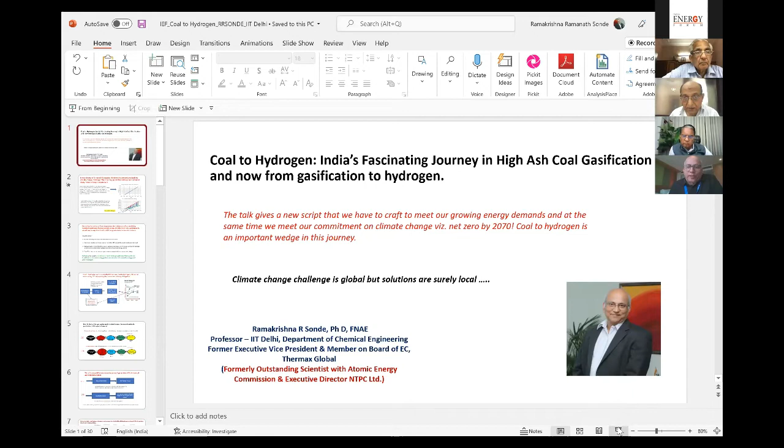All the distinguished speakers before me have really set the stage, which I think makes my delivery of speech very, very easy, because all the points that I wanted to make in my beginning have been made by everybody from Mr. Bambani to Shahi Saab to Gautam Saab and of course the Secretary, Ministry of Coal. So elegantly they have made it. So it makes my task easy.

But still, I will do a broad brush on this hydrogen. I will not get into too much detail. Maybe my subsequent speakers, both Dr. Chauhan and Mr. Samir, will get into the details about the flow sheeting and everything about hydrogen. But I'll remain on a broad brush about India's fascinating journey and why it is now imperative, I'm underlining that word imperative, to actually now look at this coal hydrogen.

And I just want to remind such an august audience, when we say coal generating hydrogen, it is not the hydrogen within the coal matrix, but it's actually splitting water. So it's actually coal and water giving rise to hydrogen and carbon monoxide.

So hydrogen comes like a water electrolysis. It comes from a thermolysis process. So I just thought, let me make it very clear that the hydrogen coming from coal is water hydrogen. Maybe only about 8 to 9% of the hydrogen will be from the coal gasification, but the rest of it, because you're taking it to a temperature of 950 degrees centigrade under catalytic conditions, you are actually getting hydrogen from water.

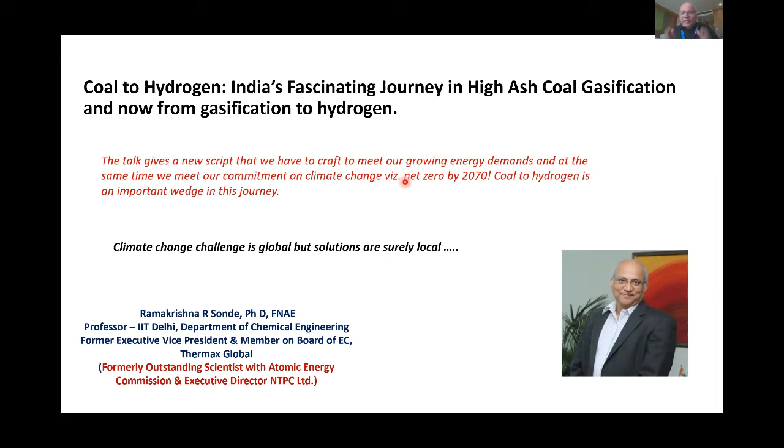So to that extent, this kind of debate about all the colors that we're giving it is a little bit, I think, as Dr. Jain said so eloquently, some Western concept that we are trying to brute force into our society, to a great disadvantage to all of us. So I think coal hydrogen becomes as green as anyone, and that's where I'm going to be making my presentation.

So like all of you said, I have done my own modeling of our energy scenario for the next 3 to 5 decades, meeting the target with the climate change challenge, and there's a big gap. Today, India is consuming about 7,000 terawatt hours of total energy, of course 1,400 terawatt hours of electrical energy. If you convert everything into terawatt hours, I don't want to get into kg of oil equivalent, but I thought terawatt hours would be a much better number, which Mr. Shahi will be able to relate to.

So if India is consuming 7,000 terawatt hours, my own analysis has shown that by 2050, India's energy requirement will be about 46,000 terawatt hours. There's a basis for this, and the basis is getting onto a per capita consumption, because India is still a work in progress. So we would need a lot of energy to reach that particular level.

And therefore, from a current 3% of the world energy requirement, India will consume about 10%, and that's equitable energy. Because of the 1.5 billion people, we will definitely require 10%, because by that time the population will be 9 billion people. So if there are 9 billion people and we'll be 1.5 billion, I think 10% of the energy consumption will be in India, and that will be about 46,000 terawatt hours. I've done my own analysis, and I'm ready for any debate on this.

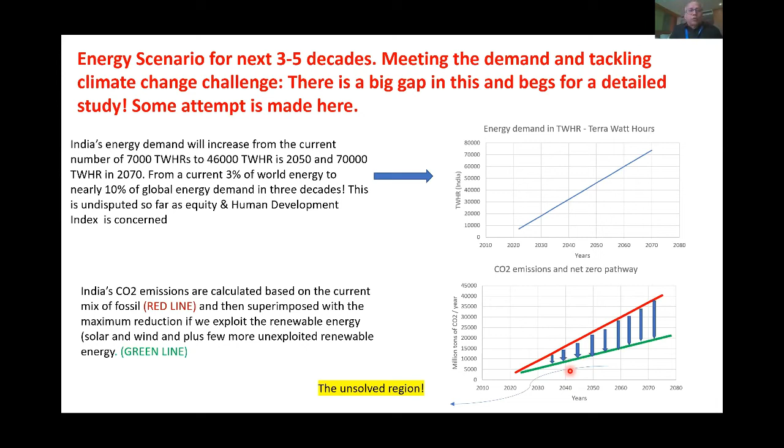So this reality strikes us from the previous plot, that even after considering maximum exploitation of the renewable energy for India, which is growing, we will need energy from fossil. Absolutely, I think this has been said. I'm just reiterating the points made by my august previous speakers. So energy independence is a vital doctrine of our country, and we all will have to do that.

We have seen what is happening today with Ukraine and Russia, and therefore it does not need a re-elaboration that we need to have energy independence. So in my opinion, what is it that we need to do? That's where I'm proposing to this audience five goals which are very, very critical. Number one, coal is our backbone, and we can last for 200 years.

At the accelerated energy, even if I take the business as usual case, with that 300 billion tons, 190 billion tons on the surface and another 200 and odd billion tons underground, it can meet the requirements. So that is one plus point. That's good news for us. Number two, coal has to reinvent itself in a new pathway, and that is the one I'm going to be bringing up. In fact, I just want to re-emphasize this point. Coal has to reinvent itself.

That whole thing about untouchability of coal because of the carbon dioxide will have to go. That means coal to gas, synthesis gas, and then do whatever you want to do, capture at the source itself. And I'll tell you the elegance of this kind of technology. Hydrogen becomes an abundant carbon-free energy carrier. So point number two is a very, very critical point. I'm converting it into a new gas, and CO2 capture at the coal gas conversion stage itself is a zero emission design. So you can always convert that and get into this.

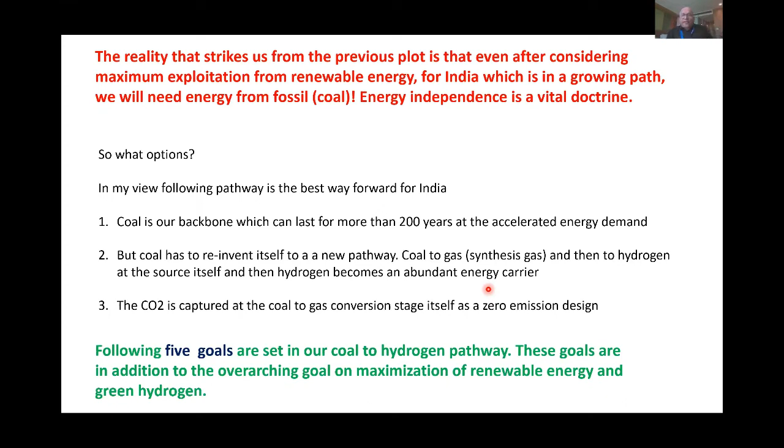I'm saying that India, with all that, will reach about 8,000 gigawatts of renewable energy, which with a capacity utilization factor of 18% will meet about 25% of our energy requirement by 2050, and then of course 2070 when we are talking about net zero. So we need to maximize that. Let me not go into what we have to do in terms of maximization. But if you agree to my argument that the balance has to come from coal, that's where I'm going to be talking.

So essentially what I'm saying is that India has to go into clean coal technology, gasification, hydrogen, and a whole lot of hydrogen-based technology. That's a very important point I'm making. Hydrogen is not to be used only in ammonia or refineries or petrochemicals. Hydrogen has to become a main energy carrier, which can generate very high energy at the demand side. That means coal to hydrogen, CTH versus CTE, abandoning the combustion pathway altogether is extremely important.

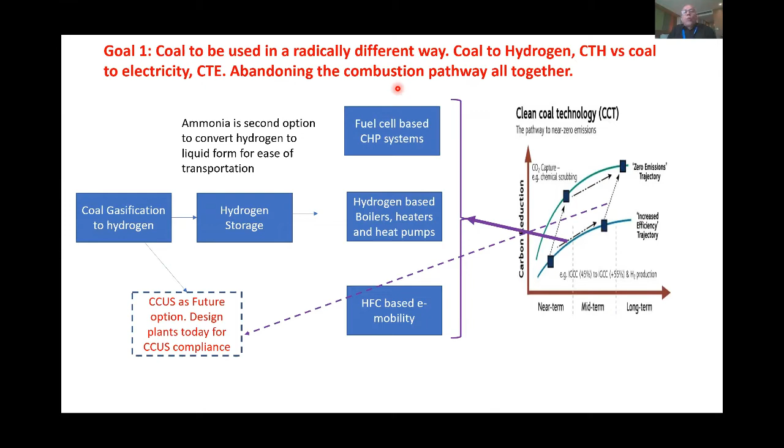So the first statement I'm making, the mindset change Shahi mentioned, is that we need coal, but coal, which was done 200 years back with a steam Rankine cycle, has to reinvent itself into coal to hydrogen. Why am I saying that? I'm saying that because look at this cycle.

This, I think, should be giving us why this particular thing. I've done this analysis, my dear friends. I can again put this in front of all of you. Coal to electricity: in the current way, when I put all this fuel extraction, combustion island, power island, transmission, T&D losses, distribution, from cradle to grave, the overall efficiency is just about 20%.

That means for every kilowatt hour that I'm receiving in my room here, 5 kilowatt hours have to be generated and 4 kilowatt hours of carbon dioxide is emitted. And that's true, this is the problem. In fact, we are blaming coal unnecessarily. Actually, we should not blame coal. It is the way that coal was utilized, because that was the cheapest way. The Industrial Revolution thought that that's the best way you can do it. The cost of coal was low, and therefore nobody bothered about efficiency.

And therefore, this particular thing became a global gold mark for converting energy from coal. And the new pathway, my dear friends, is this high efficiency pathway. I'm not bringing carbon in right now. This is my goal number one: if I'm able to convert this through gasification, the first reason is that water is split here. You get an efficiency of 95%. So there is no problem of the second law of thermodynamics, which comes in the previous cycle. Today, the gasification that I'm working on is giving us 95%. Actually, we can even recover that 5% and make it 99%.

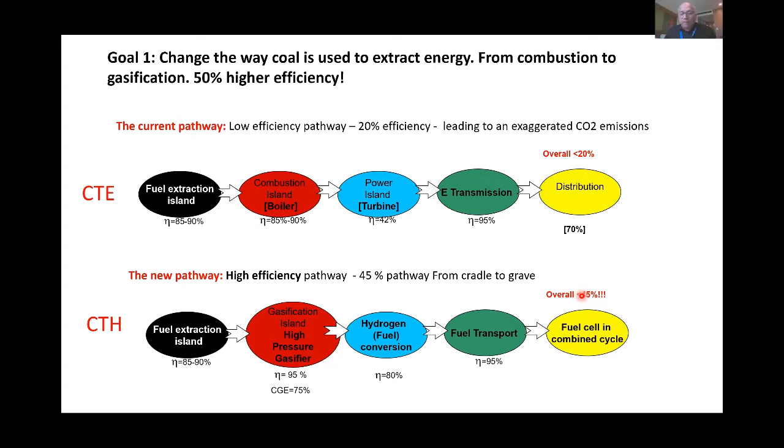And that is the main importance, what we should promote to the policymakers and every arm of society. If coal is reinventing itself, then it becomes a central energy focus for India. Now, my implicit point is that even if you don't capture carbon dioxide, we have to actually shave the overshoot rather than going for net zero right now. We'll reach there eventually by 2070, but right now, killing the overshoot of a 1.5 degrees centigrade rise, reducing carbon emissions while not compromising our energy consumption, is done by this particular process. And then the difference becomes even more when CCUS is bolted onto the basic plant.

So very clearly, a combustion-based process with carbon capture, and I was working on this when I was in NTPC, is actually a fool's paradise, or I don't want to use those extreme words, but it's not going to work out. It's not going to work because you have brought the carbon dioxide concentration to such a low level, and to capture it from there, the penalty that you pay on the electricity will be of the order of 35 to 40%, and that much investment is required. If FGD is going to cost so much, imagine what carbon dioxide capture will do.

Whereas if the coal is converted to hydrogen, it becomes very nice because by virtue of its pressure, by virtue of pre-combustion, your capture is already part of the gasification process, and those details will be indicated by my subsequent speakers. I'm tempted to give you the details, but there are important points that I'm giving here. One is hydrogen is from water. Number two is high efficiency in the entire kernel.

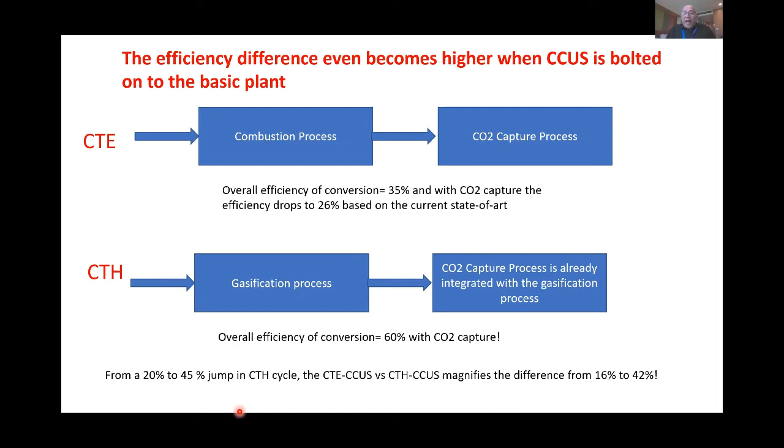And the third one is that carbon dioxide capture becomes easy, you can capture carbon dioxide like this because you've now got high pressure, your equipment is small, and the cost of the hydrogen is going to be much less. So 35% efficiency becomes 26%, and therefore it becomes very elegant. So please, I would consider that for India, coal to hydrogen, I'm making a little bold statement, is also green for India because it emits half the CO2 and capture is easy.

When I put capture, I compare apple to apple, a capture from a combustion to a capture from a coal gasification. First of all, hydrogen is able to deliver end use by various other mechanisms of much higher efficiency than the electricity. And second, I'm able to capture the carbon dioxide. Hence, the energy that is required for capturing carbon dioxide makes it that your carbon dioxide emission comes down dramatically by using hydrogen.

And you may still emit some part of it. I think we should give that allowance. When you see zero, it is not really zero. So CTH cannot be taken out of the discussion for hydrogen economy. Though we have been talking about all these things, I strongly feel with capture or without capture, hydrogen coming from coal, I hope I'm ready for a long discussion on this, but this is the basis for us to understand.

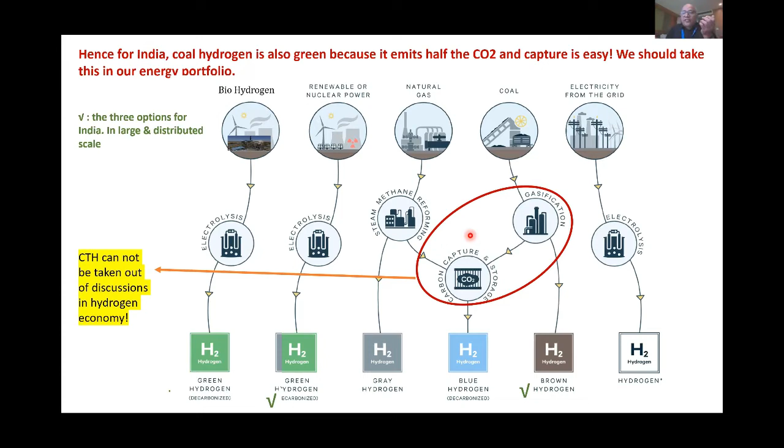And as Dr. Jain so eloquently mentioned, we will be able to deliver at 150 rupees a kilo. Again, I've done that detailed analysis. If you get the coal at about 1.8 rupees, as Dr. Jain said that you can get it at 0.8 rupees a kilo, I think we can get it under 100 rupees. And that's the beauty, if you get a 95% efficiency in your gasifier. So I'm making all these statements saying that, of course, this is 150 rupees.

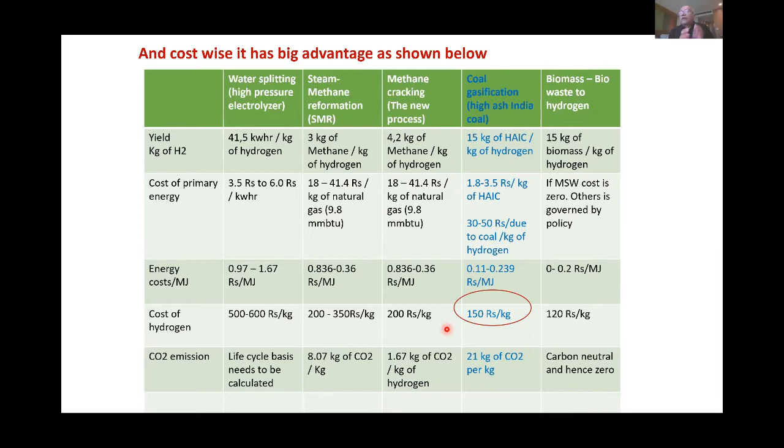If I bolt on the carbon capture, that is where this cost may become about 240 to 250 rupees, but they are far, far cheaper than what you get from your electrolysis, with those huge challenges of anion exchange membranes and various things. So if you put every factor, I'm feeling that coal reinventing itself in the form of hydrogen becomes here.

But important thing, as was also very well mentioned by Dr. Jain, Secretary, hydrogen can be made from coal today, it's a low-hanging fruit, it can be done today. But do we have an infrastructure built for hydrogen? So the focus should be not simply production: hydrogen as a carrier, hydrogen as a thermal energy supply for industrial users. When Mr. Shahi invited me to talk about fuel cells, I said that a fuel cell is a beautiful tool compared to a battery, sorry for this repetition.

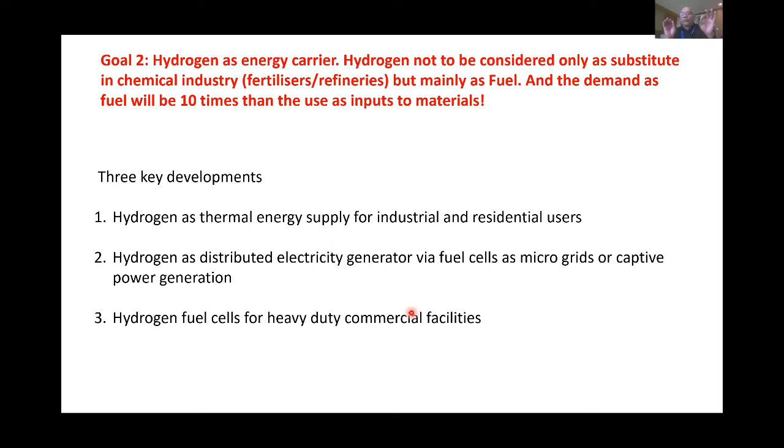Hydrogen as a distributed microgrid energy generator or hydrogen in fuel cells for heavy-duty commercial facilities will be just music for this country if you are able to get abundant quantities of hydrogen coming from coal at such a low cost at the mine mouth, and then convert that into whatever you want. You can take it as pure hydrogen, or into ammonia, or methanol or ethanol. So goal one is production. Goal two is hydrogen as an energy carrier. I'm sharing my presentation.

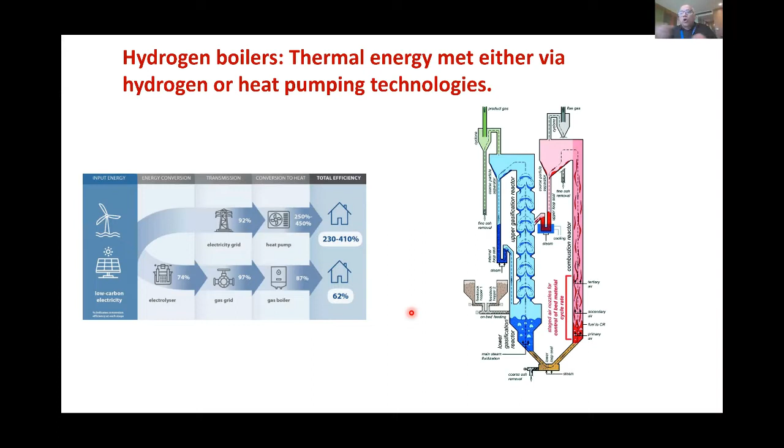Today, a hydrogen boiler gives an efficiency of 106%. Don't laugh, what is this fellow talking about, efficiency more than 100%? Yes, 106% on an LHV basis, because there is no acid dew point. Your waste can be as low as 60 degrees centigrade. Therefore, compared to a coal boiler, which can give about 88%, you can get 106% from a hydrogen-based boiler, with no NOx, no SOx, no particulate matter, nothing.

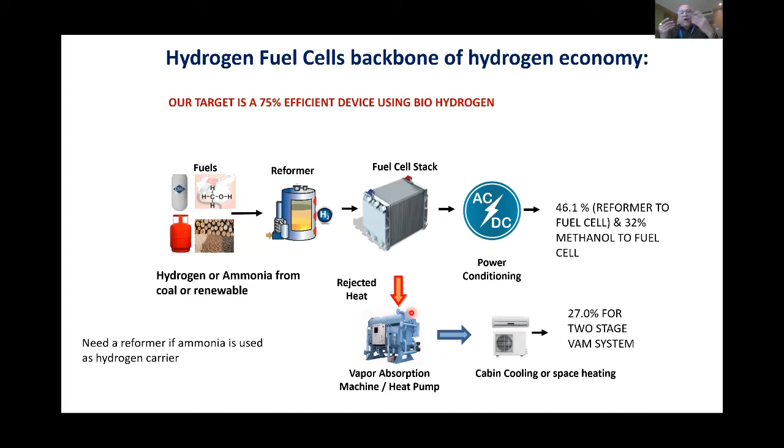And then hydrogen in fuel cells. I think we had one session on fuel cells; you can get 75% today with combined heating and power, because the fuel cell itself generates at 57%. They are far above ultra supercritical, which are languishing around 40%. This will take you to 60% like a combined cycle at a small kilowatt scale, using the waste heat. And vehicle-wise, absolutely fuel cell vehicles. I don't think there is any competition to a fuel cell based vehicle for India.

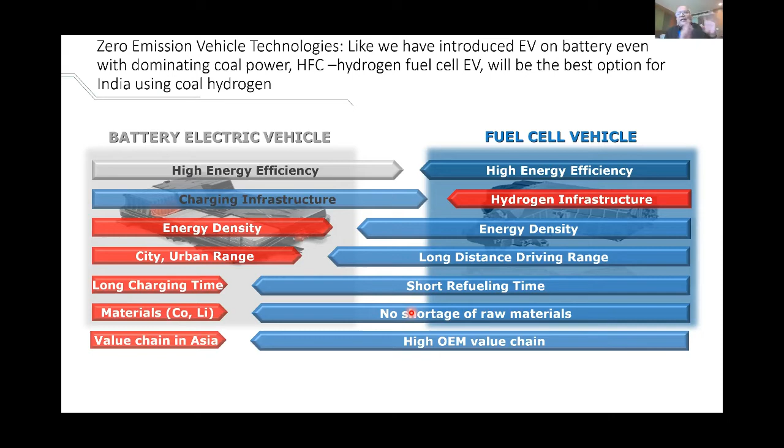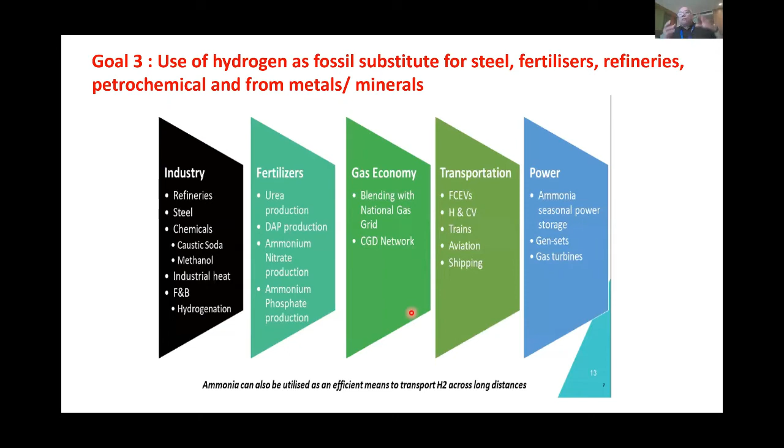When you're talking about the trailers and trucks and buses, intercity, where you can't be expecting to be pulling power from the wires and charging and all that. Yes, in a city it's okay, but not in this. So these things are important. Goal 3 is, of course, we can use hydrogen outside this energy also as a substitute in steel, fertilizer, refineries, as we have discussed. So this is the next one.

The fourth goal, an important thing, as I said, is pre-combustion carbon dioxide capture, which, as I said, we can capture in a snap of the fingers. That's the power of this hydrogen generation and capturing it. I have done a lot of work, but I'm not going to get into the details of what is the energy penalty for coal to hydrogen to capture carbon dioxide. As you can see it here itself.

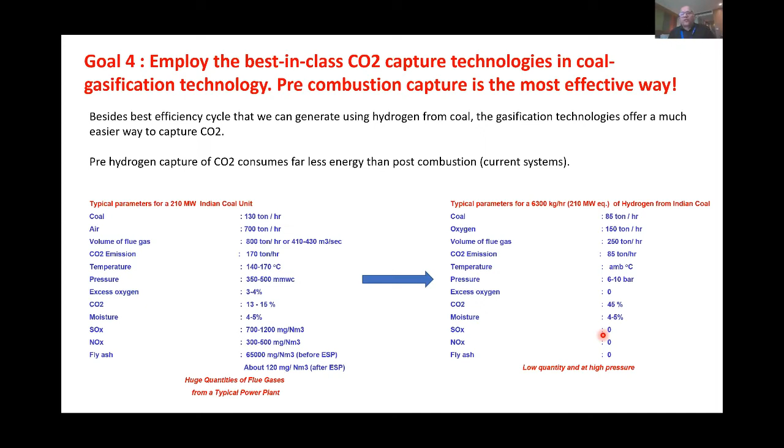We can design carbon capture ready hydrogen plants, and then bolt this on, which would make it very easy to integrate. Today, to integrate carbon capture in a thermal power plant or a blast furnace or a cement plant is, I mean, we are doing it, but it will not work out. So this is what I'm talking about.

And the last goal, my dear audience, is the CO2 conversion sequestration pathway. As Shahi Sahab so well mentioned, sequester biologically, sequester in CBM. I think we should do that. If the US is able to do it with enhanced oil recovery and all that, why not we use this? If you put your CTH plants, coal to hydrogen plants, near the mine mouth and sequester it, you don't even convert it into any chemicals. You do it, but the problem is so big.

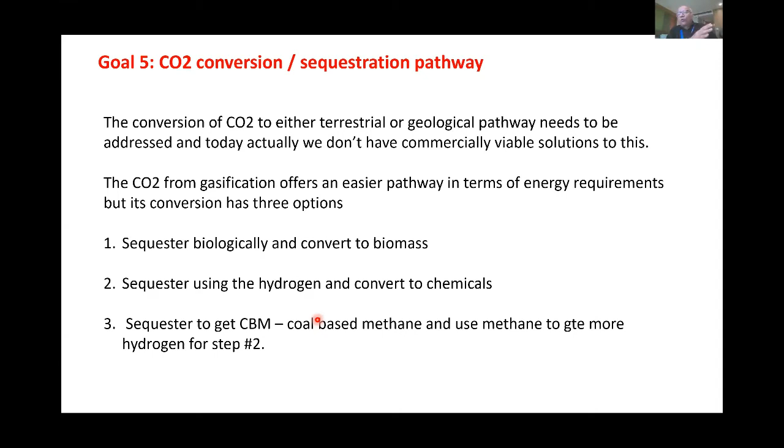We have 3,500 million tons of carbon dioxide, and conversion sequestration is the best pathway if we are able to put it in place. Of course, a huge amount of science is to be done. What happens to the seismic problems? What happens to the cap rock? And what happens to the mineralization? So there are a lot of things I don't want to go into, but I'm fully available for any questions on how we do this.

There are financial aspects, but I'll not get into the details of finance, because bringing finance into carbon conversion is a little, may I use this word, perverse? Because carbon dioxide has benefited this entire world to reach this level, and today you cannot again valorize it or convert it to anything. You need to have taxation. Developed countries should now pay more carbon tax. Unfortunately, this did not find its mention in Glasgow.

India and developing countries, where our energy has not plateaued, need to get, maybe I would say, $180 a ton of carbon dioxide. And the poorer nations should actually be getting more. So there'll be graded carbon taxation. Only then can you make carbon dioxide capture easy. The question is hinging on the capability for coal gasification, because gasification becomes an important part, gas cleanup becomes an important part, and that I would leave to the subsequent speakers.

But I would like to say, compared to all the imported technologies, the entrained bed, or even the fixed bed or moving bed coming from Lurgi, for India's high-ash coal, I think there is no further debate required, and I'm willing for a debate. Fluid bed gasification becomes the best one. Fluid bed is a broader definition for India's high-ash coal gasification. Fast fluid bed becomes a very important thing, and that is where we have developed this technology. I will not go into the development.

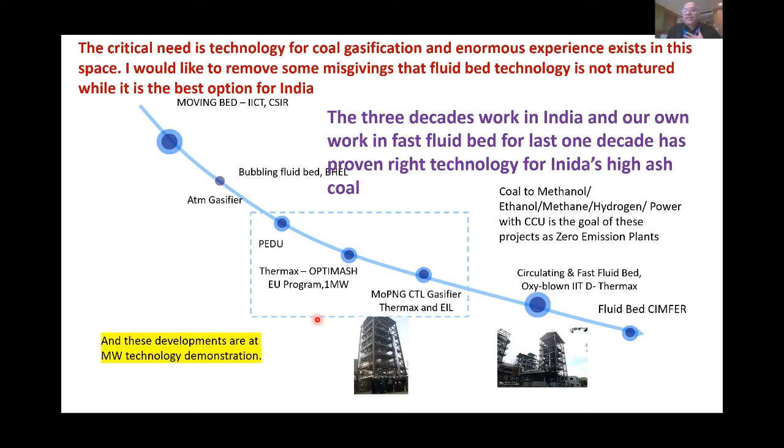Last 10 years, before I shifted to IIT Delhi as an emeritus professor, I was working on this, and it's my kind of a thing, but I'm not taking time today on this, but this is the latest. In February, we have commissioned it. It's such a beautiful way. I think finally we have found a solution: the way we can get 95% efficiency, a continuous one, at 950, so you don't have to go to a high temperature and create a problem. So I'm sorry, I'm not getting into the details, but the fact is that we have solved this problem.

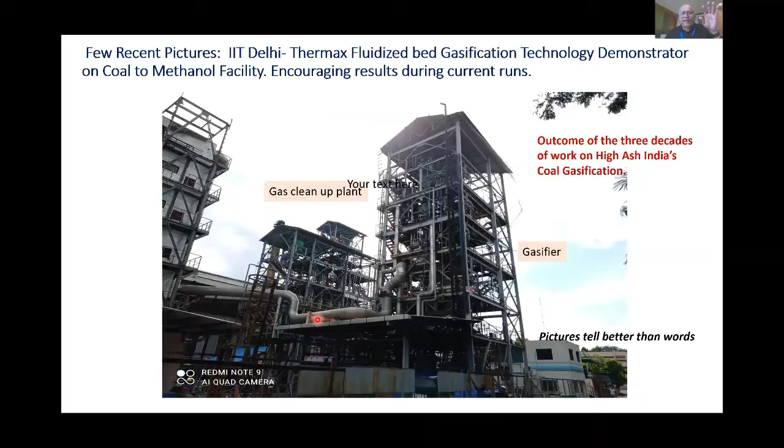This demonstration, based on a collaborative project between IIT Delhi and Thermax, under the support of DST, has demonstrated India's capability to build such complex technologies. Unlike the rest, this demonstration is a classical example. I remember 2016 when we got 50 crores of sanction from the Government of India. Every component matters, because it's not only the gasifier; the cleanup is important.

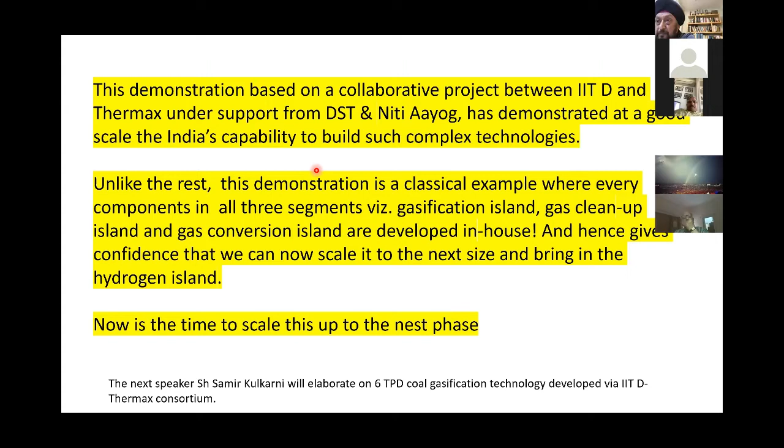As Dr. Jain said, you are generating synthesis gas, but synthesis gas coming from coal is a very dirty synthesis gas. It has got ammonia, tar, carbon dioxide, mercury, particulate matter, hydrogen sulfide. So all of them are as challenging. And in our plant in Thermax, every element has been removed with the IP. So now this is the point to take it to a high level.

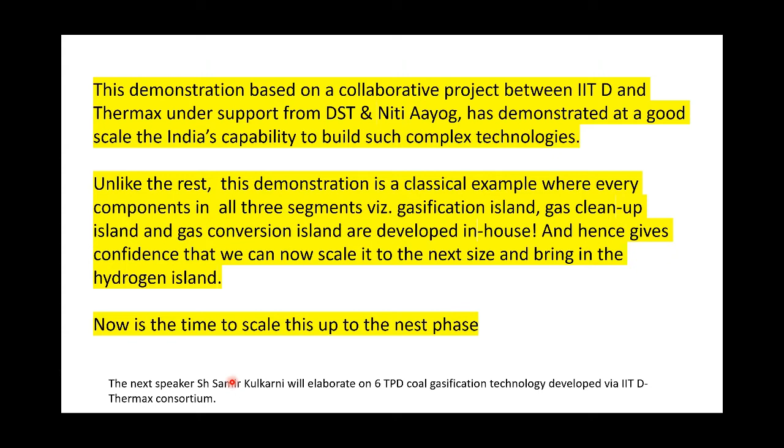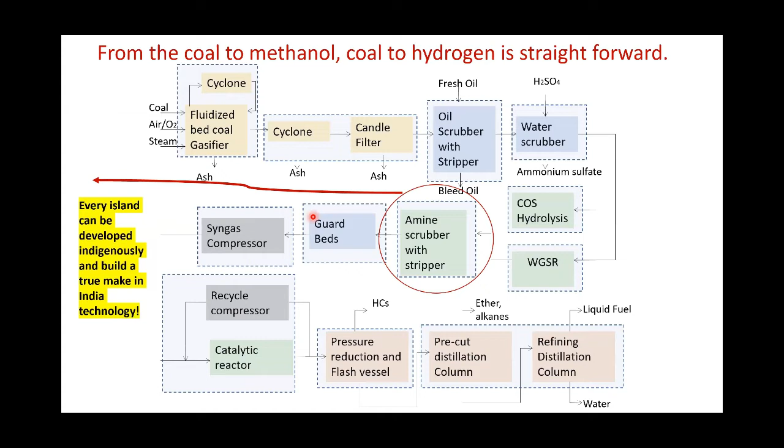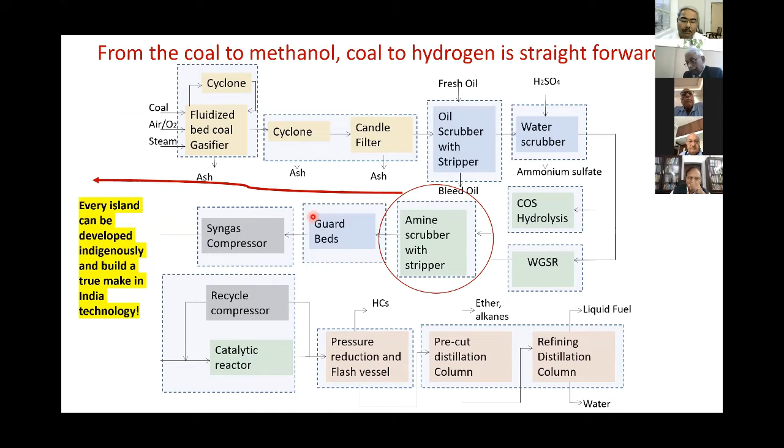So I feel that if we are looking at a hydrogen policy, yes, let renewable energy do it. It may take 3 decades. Dr. Jain said so eloquently, and I'm really hinging on that: today, if you want hydrogen, you should do it with coal gasification. Capture carbon dioxide maybe tomorrow, and day after tomorrow we can talk about all these things to give an impetus, because you capture at the source, then your carbon-free energy is available at a high efficiency, and that makes a very strong case for India to go after it.

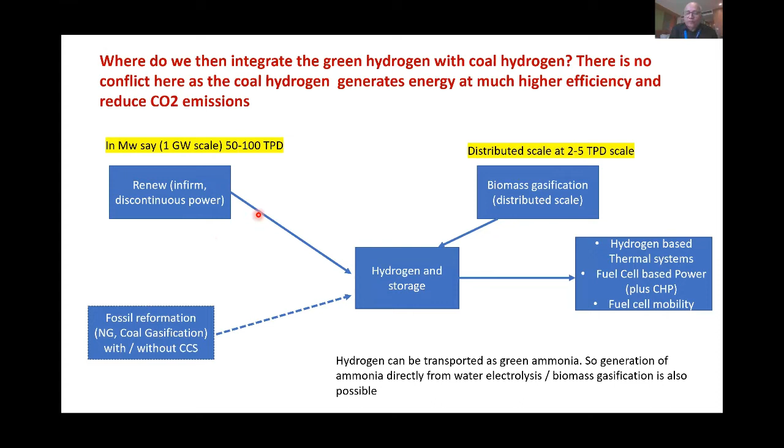I would like to suggest one thing, because this is my favorite: coal gasification can be integrated with PV power and converted to ammonia. There's a beautiful way that we are now working on. I'm working with a few international universities in IIT Delhi, on what is known as SOEC, solid oxide electrolyzer, where I can take nitrogen, carbon dioxide, and the gas coming from coal gasification, and convert this using a renewable, maybe wind or solar PV, into ammonia or hydrogen with an efficiency which is so high.

And it's a most eloquent way of converting hydrogen, and converting carbon dioxide or ammonia. So you don't have to go to the Haber process; 2 Nobel Prizes were given to Haber-Bosch, in 1918 and 1931, in chemical engineering. They are the gurus, but today the whole way of converting nitrogen to ammonia is very different if you want to get hydrogen from the coal and convert it using this particular process.

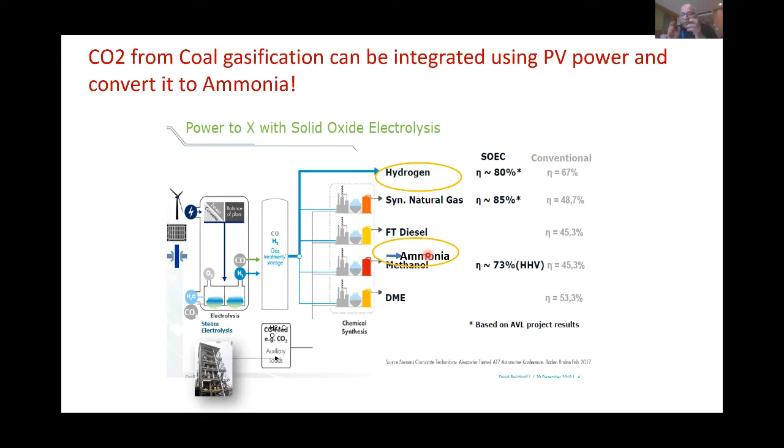So again, I'm giving a glimpse only. I'm not getting into the details, but this is one of the important tools which we need to develop other than gasification and the process of hydrogen utility. So, conclusion: 5 goals combined might perhaps deliver net zero for India. I'm just putting on my optimism hat and saying we may be able to do this if we are able to follow these 5 goals.

I will now give you my take on the nature of technology, because India has got a lot of these technologies. The way is to proliferate this, carpet bomb these technologies. If India has to use that 100 million, what the Honorable Prime Minister talked about, the best option is high ash bituminous coal using fluidized bed gasification with a cleanup technology, because we should not be stopping at only gasification. Gasification without cleanup is no gasification. Cleaning up is as important as gasification.

Second is hydrogen boilers, hydrogen fuel cells, district heating and cooling systems, hydrogen fuel driven, even hydrogen as an agricultural fuel medium. This is very important. Hydrogen to ammonia to meet India's fertilizer demand using SOEC. I just want these numbers, and we can have one full discussion on what this solid oxide electrolyzer is, where you can use PV power and coal. It's a huge hybridization to capture carbon dioxide, so that you don't have to use the hydrogen only to capture your carbon dioxide. CO2 capture technologies integrated with coal hydrogen.

And of course, you can do CBM, but tomorrow, if somebody comes up, and we are working on this, with a beautiful way that a passive molecule like CO2 can be cut into carbon and brought back into the carbon cycle, that can bring the circular economy. I think that's wonderful, and I'm sure there are people working. I'm working with TIFR on some of these new cycles where carbon dioxide and water can be converted into artificial photosynthesis. But I'd say a decade or half a decade of R&D is required. While today, what we can do is gasification, hydrogen, use of hydrogen, and then carbon capture using the amine process.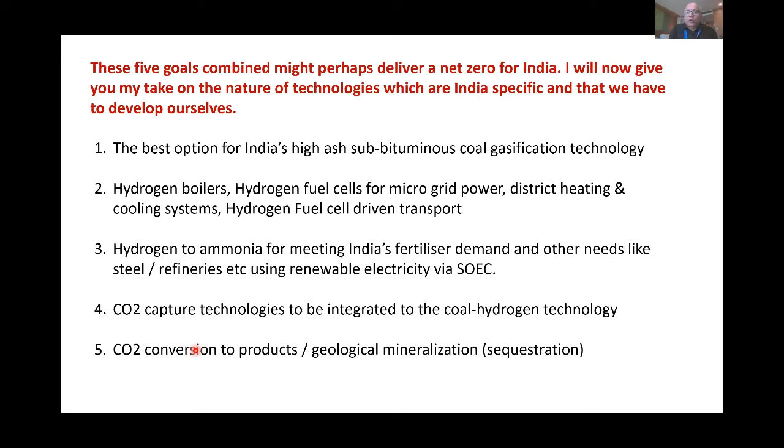So the way forward is push renewable energy. Again, this should not be misunderstood; it's an inclusive one. Renewable energy, we do it, but we realize that renewable energy can do this much, not beyond that. People may say there could be some future. I said, show me what that future is. Maybe a decade later we can review, but I don't currently see how India can meet it, given the fact that with 2% of the land mass and 17% of the population, we don't have the luxury of land. We are already increasing our land use compared to the availability. Hydrogen technologies, carbon capture, SOEC, photoelectrochemical process.

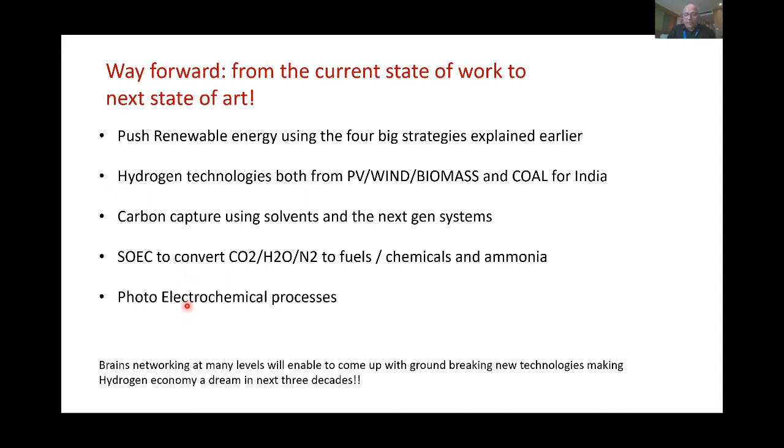So with this, my dear audience, sorry for being a little fast, but I just wanted to communicate. We must learn to happily progress together or miserably perish. Man can live individually, but can survive only collectively, is my Atharvaveda learning, which I'm following.

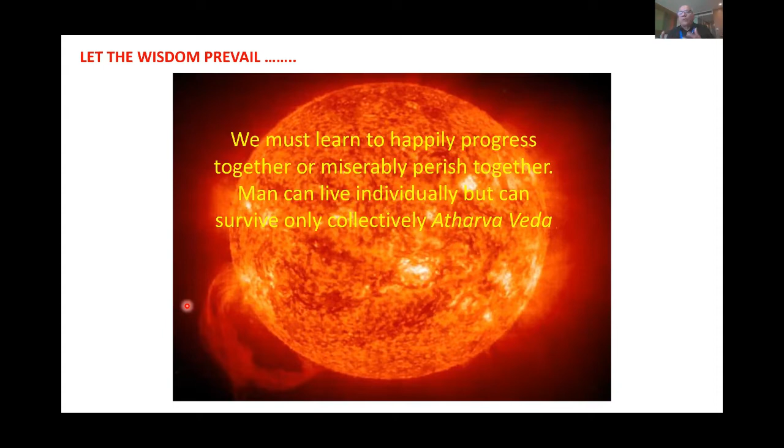Thank you. I've got one request, organizer, because I have to go back. I'm at IIT Guwahati. I have to leave in about another 15 minutes. So if there are any questions, if you can take them. Sorry for this, because I told Dr. Gautam that I had to leave today because there's an important meeting at 1:30. I'm there for up to another 20 minutes, sir. If that can be done, I would greatly appreciate it. Otherwise, I'll share my presentation with all the people so that if questions come, I can respond to them separately over the weekend. Thank you very much.

Thank you, sir. So, thank you very much, Sonde sir, because you have already covered very important aspects related to today's area. So, without wasting time, I am taking forward this discussion just by concentrating on gasification aspects directly. So, we are quite aware that Government of India's plan related to gasification consists of 2 important aspects.

Mainly, one is related to utilization of commercial gasifiers wherever possible, wherever low ash coal reserves are available. Already certain projects are in pipeline with this particular aspect, and parallelly an important program is related to development of indigenous gasifier, mainly fluidized bed gasifier is targeted, and already several organizations are working in this area. CSIR-CIMFR also has developed a fluidized bed gasifier having capacity 1.5 TPD coal feed rate. Just now, Sonde sir has explained developments and achievements at Thermax. In parallel, BHEL is also working.

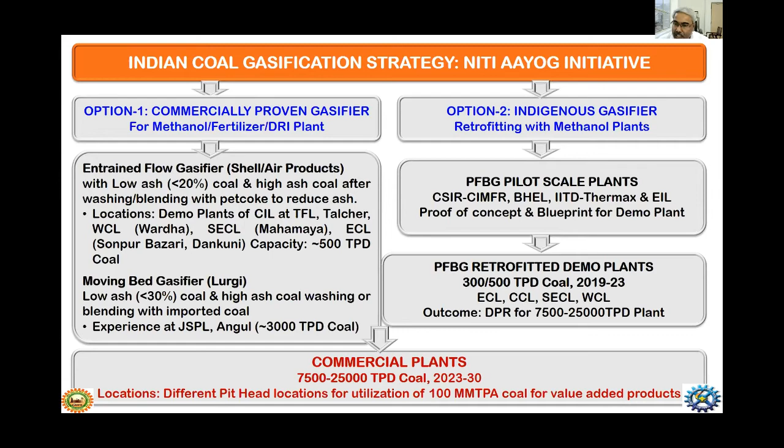So what should be the next roadmap or way forward to utilize these developments? I will concentrate on those aspects only. Directly, I am sharing a few achievements at CSIR-CIMFR. When we talk about gasification, this particular aspect is quite important, related to understanding of the feedstock. Because several aspects are related to this particular exercise, mainly selection of the perfect gasifier, development of matching operational philosophy, because this is not any pure form chemical, this is a mineral.

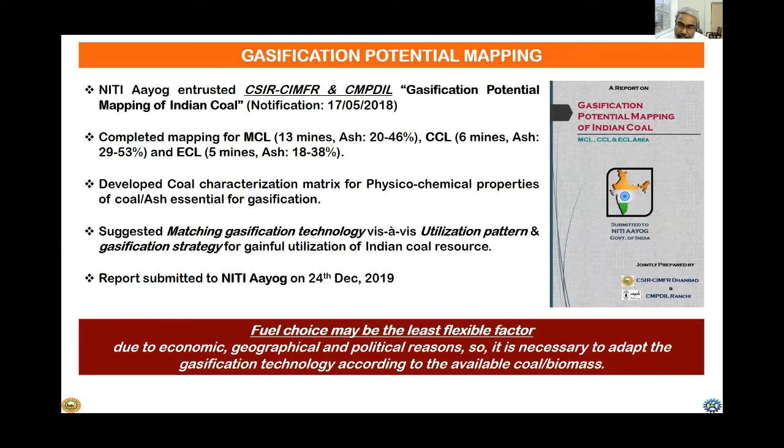So operating any gasifier, whether it is commercially proven or developing gasifier, thorough understanding about the feedstock is very much essential, not only for selection, but for operation also, to understand the operational issues, to predict the performance in a particular gasifier. So we have covered certain part, mapping related part, for MCL, CCL and ECL area, and also targeted the remaining area. This is an important aspect. We will discuss relevance of this particular exercise in subsequent slides.

We installed this fluidized bed gasification facility in 2020. And till today, we have tested coals from various mines, mainly MCL area, CCL area, having ash content up to 42%. And fortunately, we have achieved syngas composition, CO and hydrogen mainly in the range of 25 to 30%, which is quite suitable, very much attractive for downstream applications, including hydrogen or various other products also.

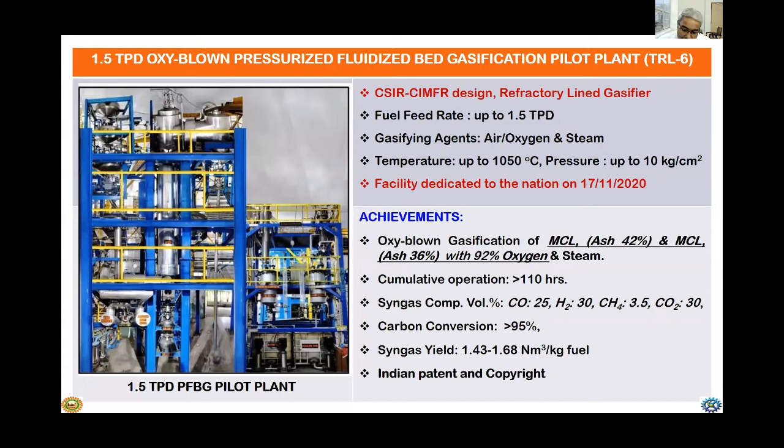Even carbon conversion and syngas yield, these figures are also attractive and quite comparable with the commercially proven gasifiers. And presently, we are in the process of installation of downstream modules for micro cleaning of the generated syngas. Yes, a lot of cleaning will be required for any further processing or utilization of the generated syngas. So, a micro cleaning facility followed by CO2 removal as well as a methanol reactor.

These modules we are adding at the downstream, along with development of the indigenous catalyst, specifically for the water gas shift reaction as well as for methanol. So this particular module we can utilize for generation of hydrogen for any application. So in today's perspective, we can concentrate mainly on gasification because this is the very essential and critical step, whether it is generation of hydrogen or methanol, any product.

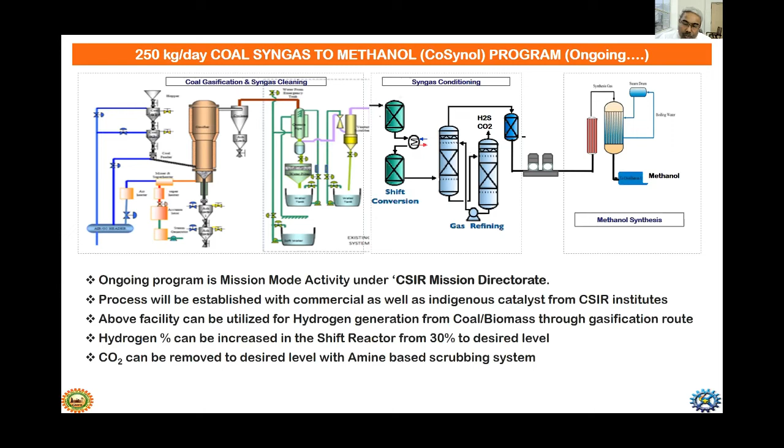After these particular achievements at pilot scale level, what should be the way forward? That is most important, we can say. So as we have discussed, thorough understanding of all the coal resources in India, from each and every mine, is very much essential. Parallelly, as already discussed, the government's plan with commercially proven gasifiers should be taken forward because we have certain reserves with low ash content also.

So without wasting time for demo scale and upscaling to commercial scale, this particular route should be taken forward so that we can compare indigenous developments, and the better, attractive option we can take forward for further exploitation at different mines. So these particular steps should also be considered and taken forward as planned by the Niti Aayog.

Another important aspect, we can say, target is taking forward the developments related to PFBG to demo scale level. This is a very important aspect for utilization of coal for any value added application through the gasification route. And success in this particular stage will prompt further steps, further actions in this direction. So to take forward this development, a strong consortium between the R&D institutions, engineering houses, as well as industry partners is very much essential for demo scale development.

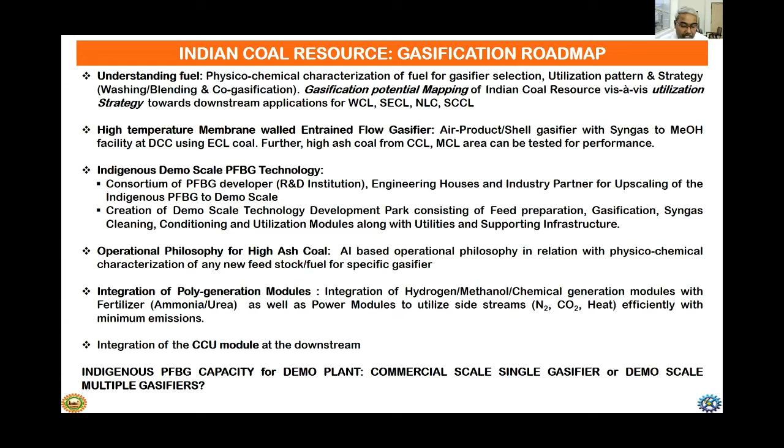So with this background, I think a technology development park will be very much important. It will play an important role, where it will be a complete setup, including upstream and downstream modules for cleaning and utilization, along with gasification. Though it will be investment intensive, capex and opex will be more for all these modules, because the complete setup we need to develop with all the upstream and downstream modules, along with dedicated manpower, utilities, as well as all types of support.

So this will be a comparatively capex and opex intensive option, but several advantages are also there with this particular option, because this facility will be dedicated for any upgradations, addition or removal of any module as per necessity, future plans, or depending upon feedstock variations. So we can play with this facility, and all developments in this particular area can be taken forward in a faster way.

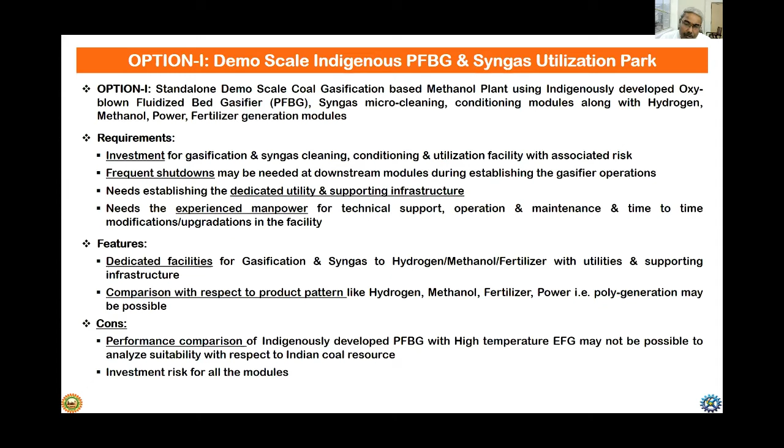Another attractive option, from an investment point of view, may be retrofitting the current developments, mainly the gasification island, with planned projects where a commercially proven gasifier is considered. In parallel with that gasifier, we can place these newer developments, indigenously developed fluidized bed gasifiers. At least a single module we can place, and we can compare the performance, and then we can take it forward for

commercial exploitation. Any best suitable one we can take forward for the other installations, or we can even install these new developments at any site where natural gas is being utilized for either fertilizer production or methanol production. At those sites also, very quickly we can install these newly developed gasifiers at demo scale level, and once operation is established for high ash coal successfully at demo scale level, this gas can be

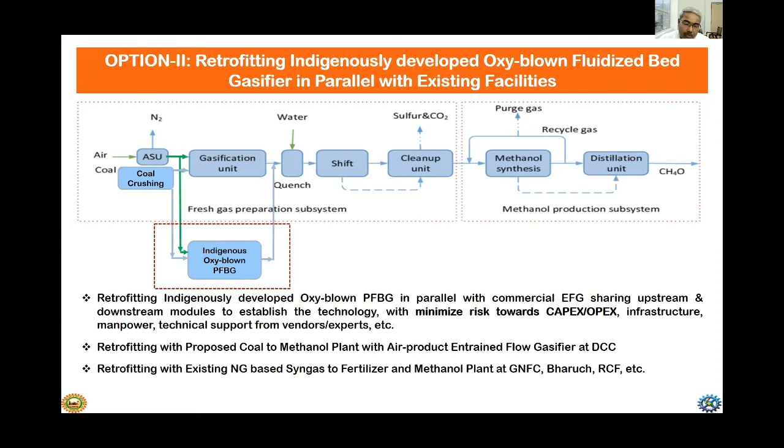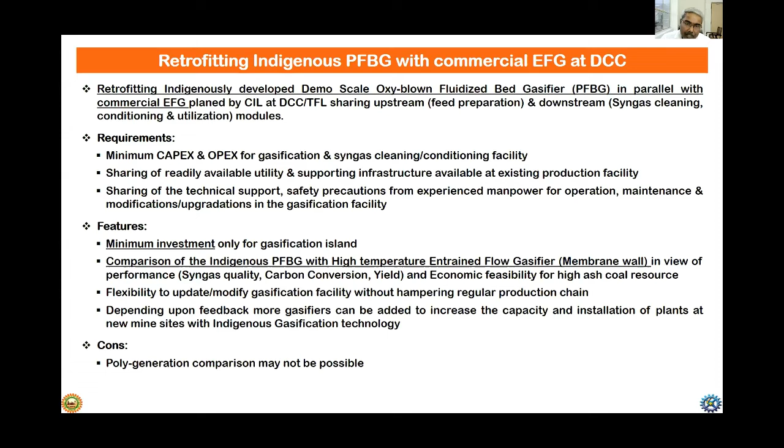So with these two options, either at commercially planned projects, say Dankuni coal complex, where the Shell gasifier is considered along with the methanol generation module, at this particular location we can place this indigenously developed fluidized bed gasifier, or we can place this gasifier at GNFC, RCF, or any similar type of organization. Simply, we need to install these newly developed gasifiers in the nearby premises, and syngas can be utilized. So these three options are there.

Yes, definitely, the first option in the long term is comparatively the best suitable option, where subsequent indigenous developments can be tested at demo scale level. So an indigenous gasification technology development park will be the most attractive, most useful option. However, it will be a little capex intensive, requiring several supporting facilities and utilities. The other two options are also there.

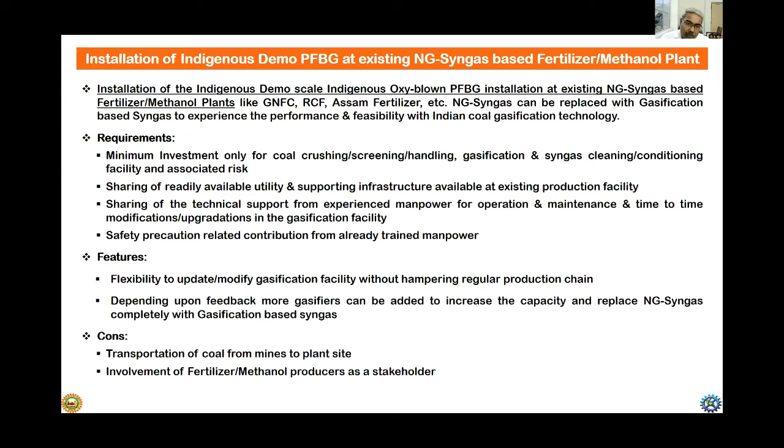So at the end, I just want to highlight all these discussed points. Indigenous development will be an attractive option to handle the high ash resources, mainly since fluidized bed is a proven technology at this stage, at pilot scale level. So we need to take forward these developments with the help of all these consortium partners, and engineering inputs from these current developments are quite suitable to take forward at demo scale level. CSIR-CIMFR will play an important role along with other engineering houses as well as industry partners to take forward this

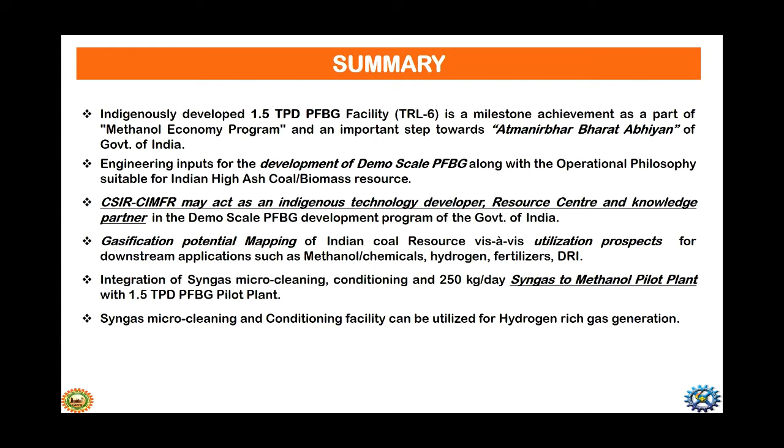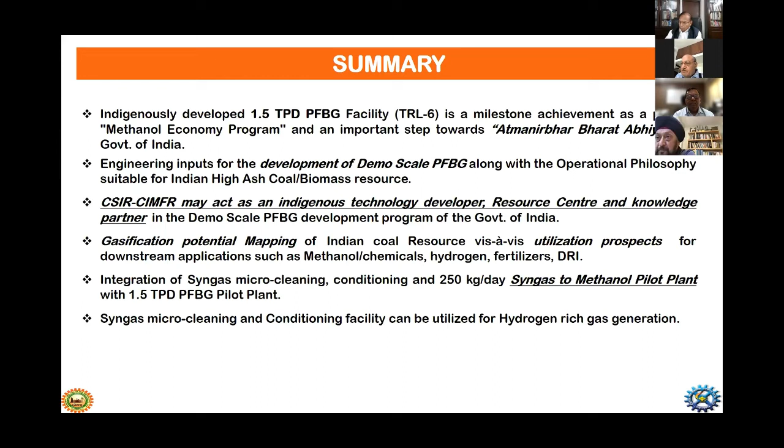development. Also, we can take up other activities, including gasification potential mapping for the remaining coal fields and remaining subsidiaries of Coal India, and downstream facilities development once we achieve this installation, and we can utilize this development for hydrogen generation. Only thing is that a CO2 utilization related module we need to consider, because, as discussed by eminent speakers, without CO2 capture and utilization, hydrogen generation, I think, will be difficult.

Dr. Kulkarni has done his MTech in heat power refrigeration and his BE in mechanical engineering. He has worked as General Manager, Research and Technology Information Center, Thermax Limited. He has more than 30 years of R&D experience in heat transfer equipment, fluidized boilers, coal and biomass combustion, heaters, vapor absorption systems, fuel cells, etc. He has led a number of product development programs to commercial success. Currently, he is advising the R&D project team working on different mission projects in the field of energy and environment at the Research Technology Center, the Innovation Center of Thermax.

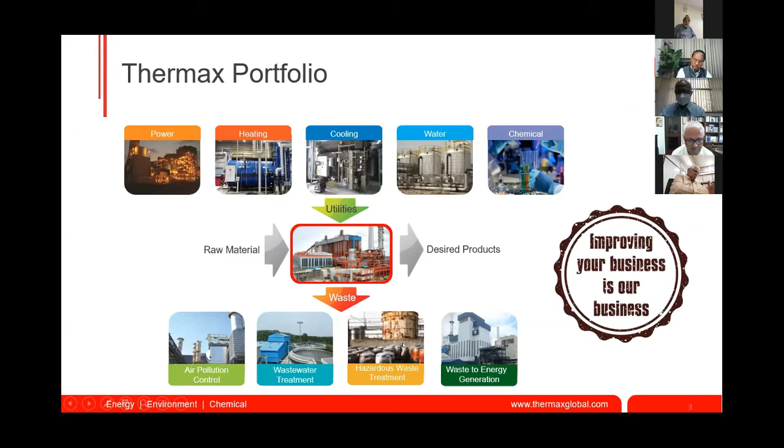And what Thermax does is, we serve the commercial and industrial sector of India and the world by providing power-related, heating or cooling, or water and chemical-related solutions to the industry. And as we provide the utilities, we also deal with the wastes produced from them regarding air pollution control, wastewater treatment, hazardous waste, and also provide waste-to-energy solutions.

So with this, I will turn to the gasification topic. I would like to briefly tell you about a decade of Thermax experience on the different gasification technologies and the associations and partnerships that we have done with MNRE, IIT Delhi, DST, EIL, Bharat Petroleum, and some international institutes like ECN and Dahlman, CNRS, and others.

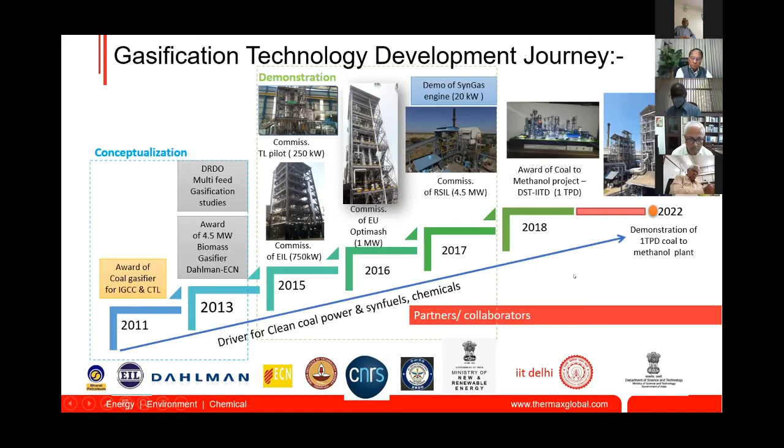So we started in 2011 and have built 4 or 5 demonstration plants covering coal as well as biomass. These are the pictures of some of these plants. We have a demonstration-cum-pilot unit at Thermax which fires 1 TPD coal. Then we have a 2.4 TPD pressurized fluidized bed gasification unit at EIL for converting coal to liquids.

Then we have a 4 TPD pressurized fluidized bed gasifier at Thermax. It was sponsored by an EU project and generates syngas. And we also have a 30 TPD dual bed fluidized bed gasifier for agri residues at Washim.

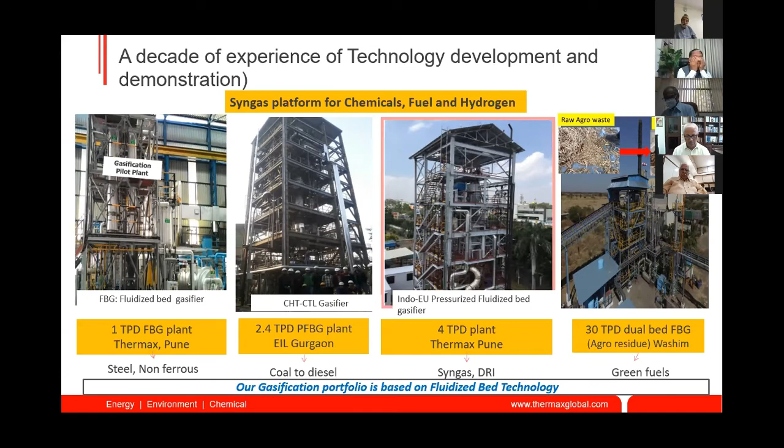So our gasification portfolio is based on the fluidized bed technology, which many of the speakers have talked about as being the only suitable technology for Indian coal, because the fluidized bed technology can accept high ash coal. Maybe 50% or more of India's coal reserves are more than 35% ash, and none of the other technologies, say entrained bed or moving bed, can handle that kind of ash.

Apart from handling high ash coal, the reliability of the system is also very high because fluidized beds operate at lower temperatures and velocities than entrained beds, where the ash remains as dry ash and doesn't get converted to slag. The abrasive nature of India's ash leads to maintenance problems in the other technologies, whereas operating at lower temperature and lower velocities, these problems are not present in the system.

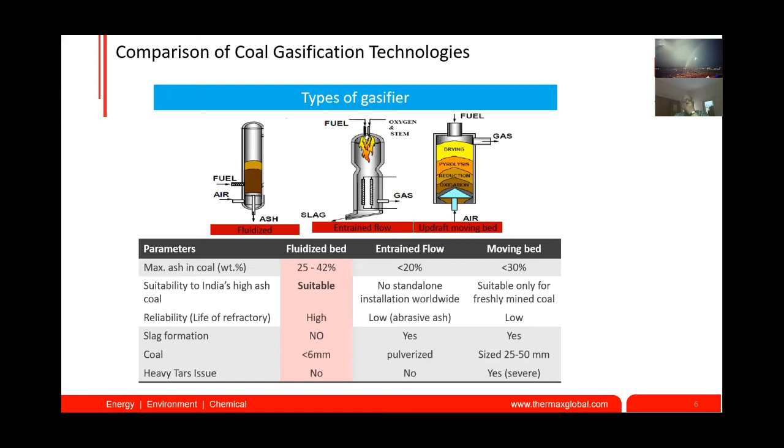When we use coal, we don't have to pulverize it. It has to be sized to, say, less than 6 mm. And being a highly reactive reactor operating at a temperature above 900 degrees centigrade, the heavy tar issues normally present in the moving bed type of gasifier are not there.

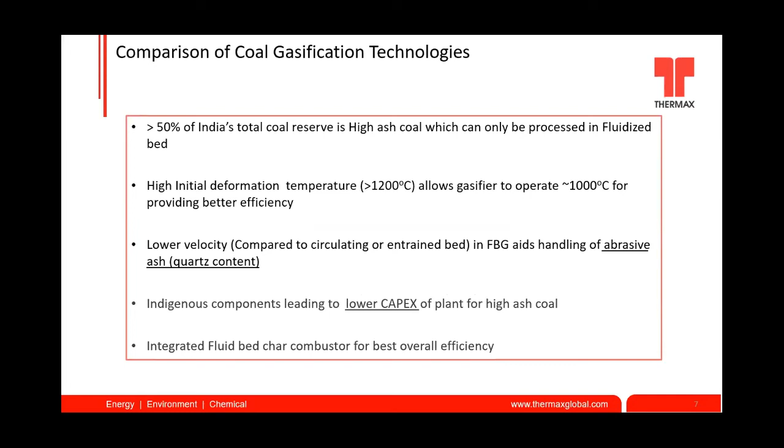So just to summarize the comparison of coal gasification technologies, for 50% or more of India's coal reserves, the fluidized bed technology is the only solution. And because of the high initial deformation temperature of Indian coals, the gasifiers operate at about 1000 degrees, which gives the efficiency and doesn't result in some of the problems faced in entrained bed gasifiers.

So I will talk about the recent success that we achieved in converting coal to methanol. This is oxy-blown fluidized bed gasification operating on high ash coal. And as mentioned by Dr. Sondev, everything is made indigenously from first principles, all the cleanup and methanol, which I will talk about later. This is a 1 TPD coal unit, and currently the trials are going on.

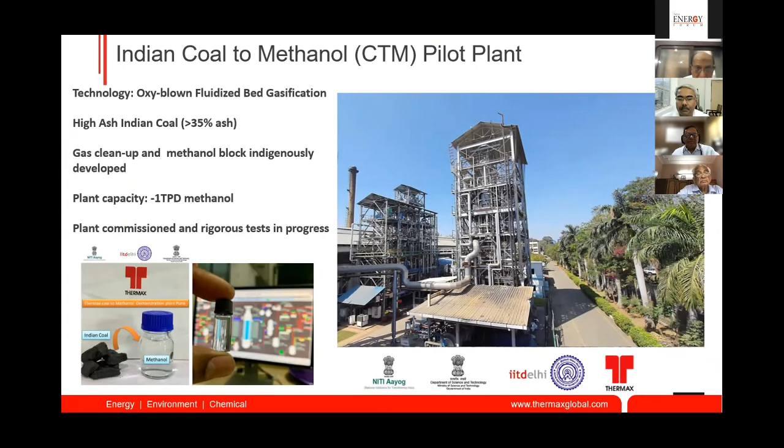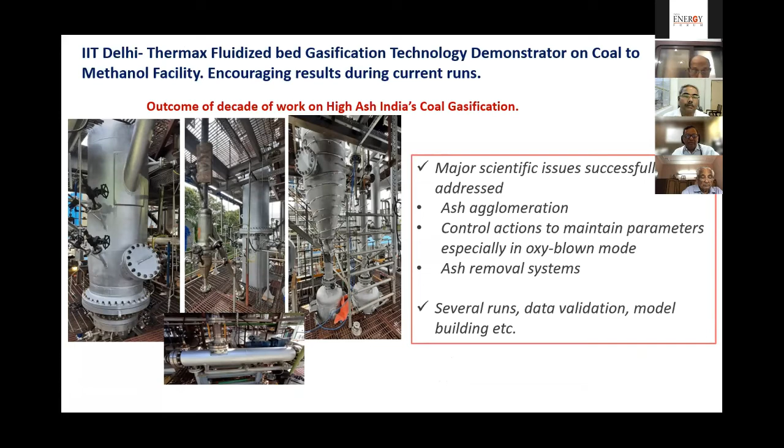This gives a picture of the entire plant. These pictures are of the gasifier section, along with the coal feeding section, ash removal section, and other things. Most of the problems are associated with ash agglomeration and the control actions, especially for oxy-blown, because it becomes very delicate to operate the system. But we have overcome all these control issues to maintain good parameters. And the ash which comes out at high temperature we are able to handle with the help of water-cooled screws.

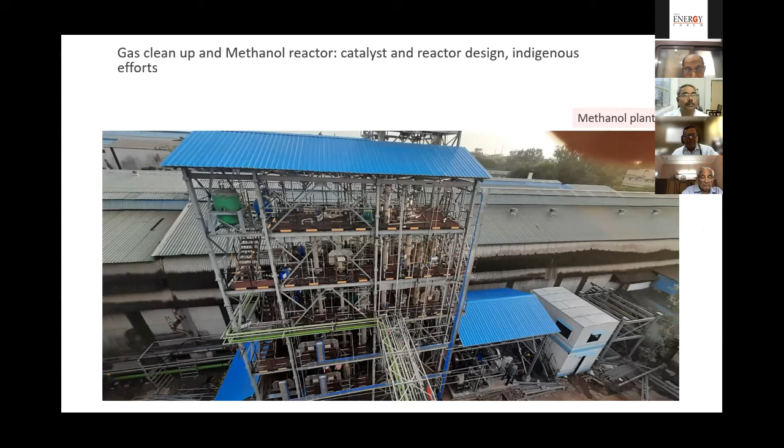This is the picture of the gas cleanup and the methanol reactor system. The complete elaborate process is like a chemical plant installed at a very small level, a miniaturized chemical plant, which I will talk about later.

Some of the results from the air-blown gasification campaigns that we had, operating at above 900 degrees, at moderate pressure, and with different coals.

We started with 27 to 30% ash coal, and finally ended up in about 40% ash coal. And recently we asked for the high ash coal, and what we have received is a 50% ash coal from the Western coal field. So imagine the problems that can be faced in the other gasification technologies, but we are able to handle these coals in the fluidized bed.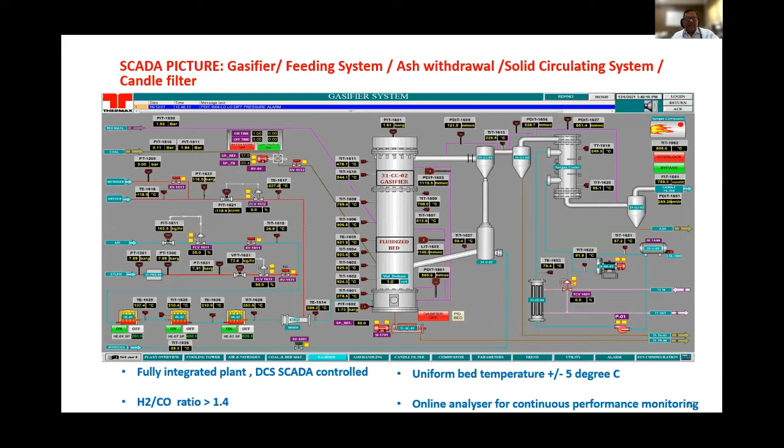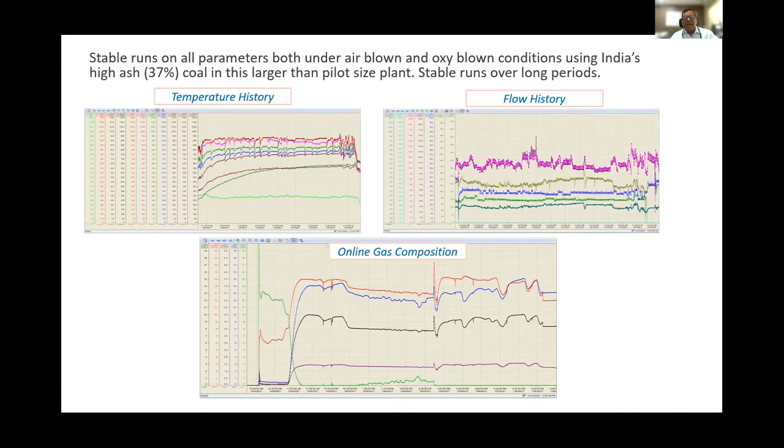And so we have a lot of data collected, and you can see from these plots, the temperature history, the flow history, or the composition history, that the operation of the system is very stable, which is a very good achievement as far as the fluidized bed gasification technology is concerned.

Coming to the coal gasification, as we know the coal gasification produces syngas, and what is the industrial use of this syngas? It is used for the fertilizer, steel, chemical, refinery, petrochemical, but in the fertilizer, the urea production and other chemical production, and the refineries, it is used as hydrogen, whereas the syngas itself can be converted to methanol or other intermediates for other sectors.

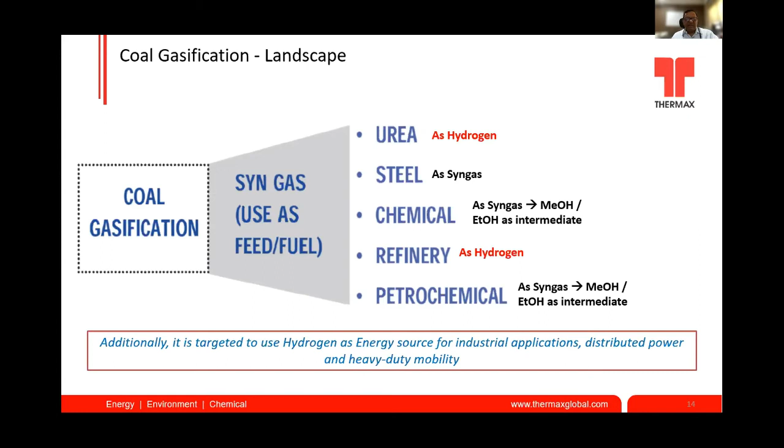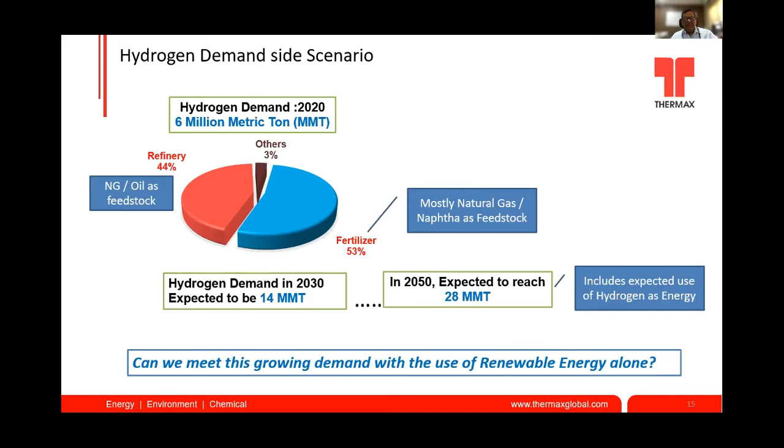So this is the story today, because if you look at the hydrogen demand, last year the demand was almost 6 million metric tons, which is expected to grow to about 14 million metric tons in 2030, and by 2050 it is expected to grow to 28 million tons. So up to 2030, it is not expected that too much energy use will be there for hydrogen. And you can see as of today it is only the industrial use, where the refinery is using 44% and fertilizer 53%. And they are using natural gas and oil as a feedstock, or naphtha for the fertilizers. Once the demand goes up, can we meet this demand by renewable energy, because we only have the green hydrogen policy and we don't have a policy on coal to hydrogen.

So I just looked at a few numbers here. The primary energy requirement: we produced 1300 terawatt hours through utilities, that is mainly coal, in 2021. And if you see the pattern of the targeted renewable energy installations, last year we had 50, and this year we will achieve 175, a big jump in installations. And in 2030, we are targeting about 450 gigawatts. Now, we have the numbers of the terawatt hours that this installed capacity can produce.

But if you assume that almost 50% of this renewable energy is given for generating hydrogen, which again is a very huge number, it shows that with this 50% of the renewable energy, we can produce only 2.6 million tons of hydrogen this year, or in 2030, 6.7 million tons of hydrogen, which is low. As the hydrogen demand is going up, renewable energy is going up, but ultimately we will only be meeting about 50% of the hydrogen demand.

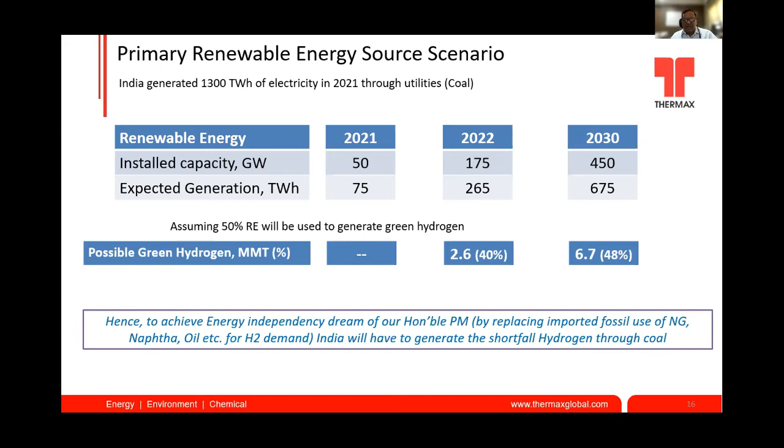Now, just another example: if you have to produce hydrogen from grid power, because we have the grid installed capacity, and if you use 1 million ton of high ash coal per annum, it can generate about 90 TPD of hydrogen from that 200 megawatt power plant. But if you go through the coal gasification route, the same amount of coal can generate 125 TPD of hydrogen, and additionally 30 megawatt of power. So you see the difference in energy efficiency that coal gasification can give over the electrolysis route. So there is no doubt that we will have to go for hydrogen from coal.

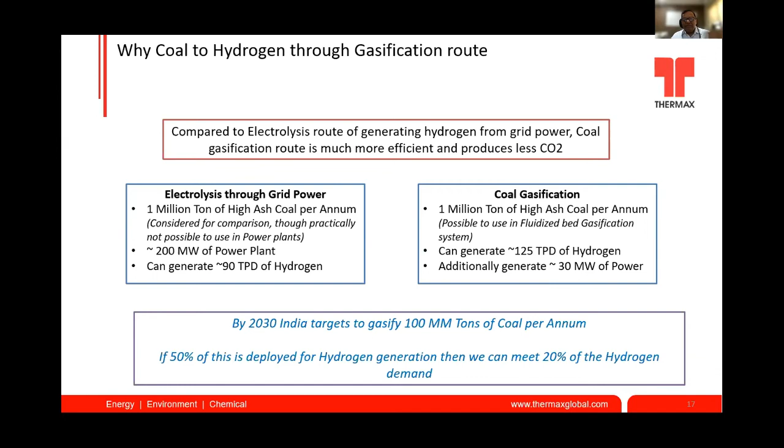And suppose we say that in 2030, we are targeting to gasify 100 million tons of coal per annum. If 50% of this coal is available for hydrogen generation, then we can meet 20% of the hydrogen demand, which I specified in my earlier slides.

Let us go to what is the technology availability or the preparedness of addressing this hydrogen demand. The coal gasification is not very simple, because it produces so many contaminants which are harmful either for the compressor or for the catalyst that is used further downstream to produce methanol, or even the hydrogen PSA plant. So we need to remove all these contaminants which are in the form of tars, ammonia, carbonyl sulfide, mercury, H2S, or CO2. And we have the basic handle on what are the target parameters if you have to achieve the maximum methanol generation.

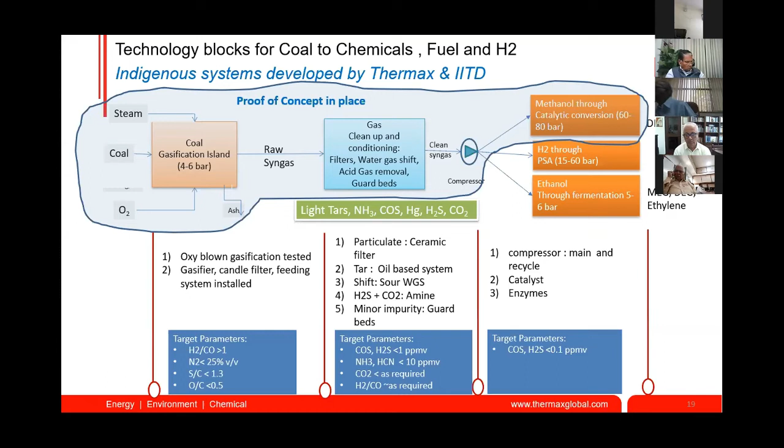What are the H2/CO ratios? What are the different S/C ratios and other things, as well as what are the parameters we need to work on for the H2 through PSA? And as also suggested by Dr. Chavan, it is not a bad idea to use the existing pilot plants, let us say the plant at Thermax, and add on a module of hydrogen to see the integration of the total system through a certain project. So this is more in detail about the different aspects. The CO2 is already captured and it is ready for utilization.

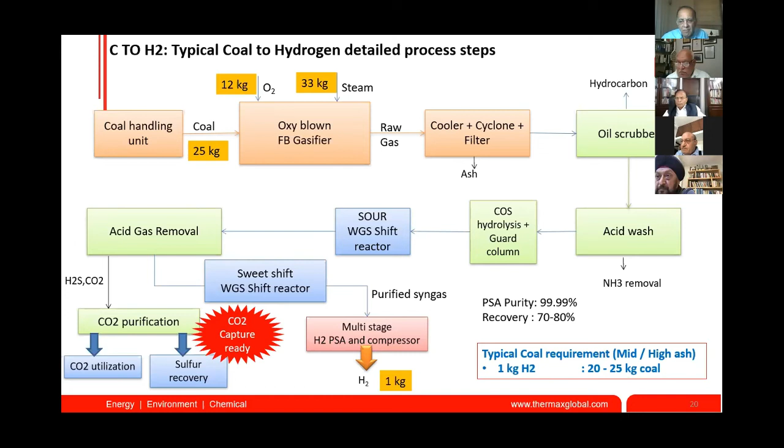Here are some numbers in terms of how much hydrogen can get produced from coal. Typically from high ash coal, to produce 1 kg of hydrogen, you require about 20 to 25 kg of coal, about 12 kg of oxygen, and 33 kg of steam. So these are some of the numbers, or some of the process flow sheets that we have worked out to achieve this. Apart from the technology preparedness, you need to have all the components and the subsystems also in place.

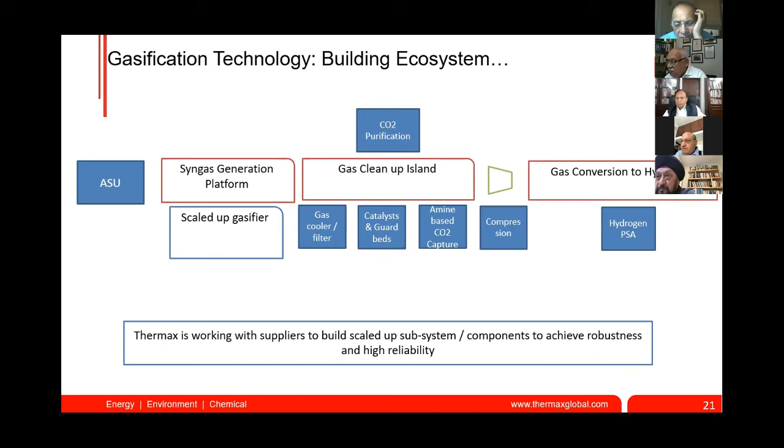And you have an air separation unit to be installed for CO2 purification. There are a lot of catalysts and guard beds. There are amine-based CO2 systems, compressors, PSA systems. So the whole ecosystem of suppliers and vendors needs to be built, and we are working on these things so that ultimately we can have coal to hydrogen plants which are robust and with high reliability.

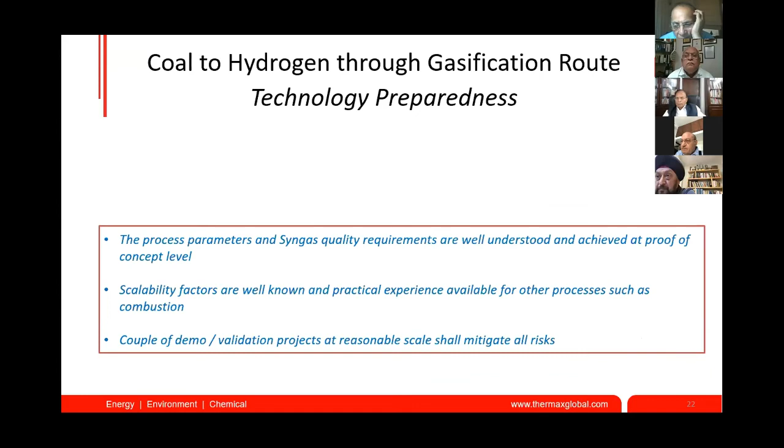Great. So, I think this paper is being circulated, isn't it? Yeah, I will circulate it. Sure. Thank you very much. Excellent presentation. I have a few points to be made. Can I make it in the last 2 slides? Okay, be quick about it. The summary slides, I can present it if you permit me, sir.

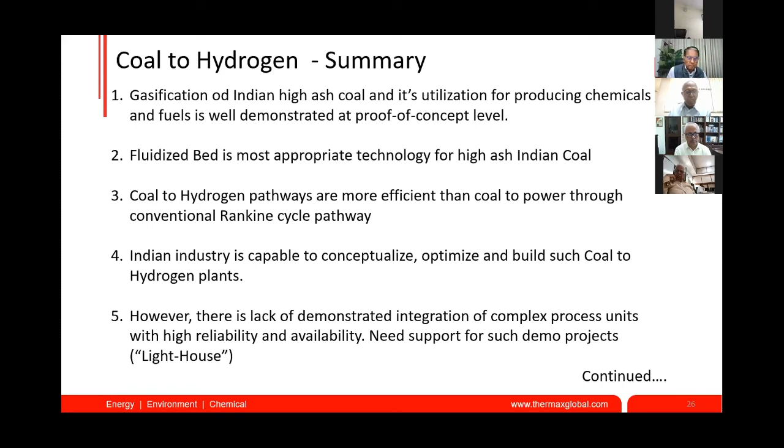Please. Yeah, sure. So the gasification of Indian high ash coal is demonstrated at a full proof of concept level. Fluidized bed is the most appropriate technology. The coal to hydrogen pathways are more efficient than the Rankine cycle pathway. Indian industry is capable to conceptualize, optimize, and build such plants. However, there is a lack of demonstrated integration of these complex process units with high reliability, and there is a need to support such lighthouse projects in the future.

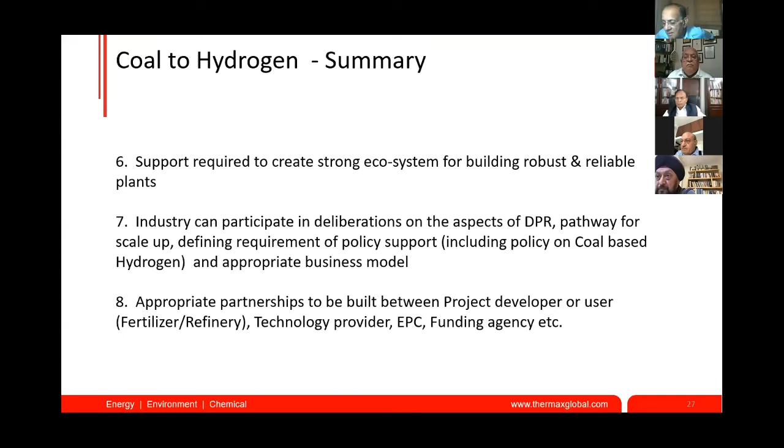And we also require to build a lot of ecosystem to build robust and reliable plants. As an industry, we can participate in such deliberations on the aspects of DPR, scale up, defining the policy requirements and supports, and as mentioned by the Honorable Coal Secretary, there can be a policy on coal-based hydrogen also, and we also need to build appropriate models. So with this, I thank you for giving me the opportunity, and back to you.

Thank you, Mr. Kulkarni. We can really be proud as a nation of all this achievement. And I'm sure that the support that we are looking for will come in due course. The country is gradually becoming very conscious of it and very concerned about it. I'm sure that support will be coming.